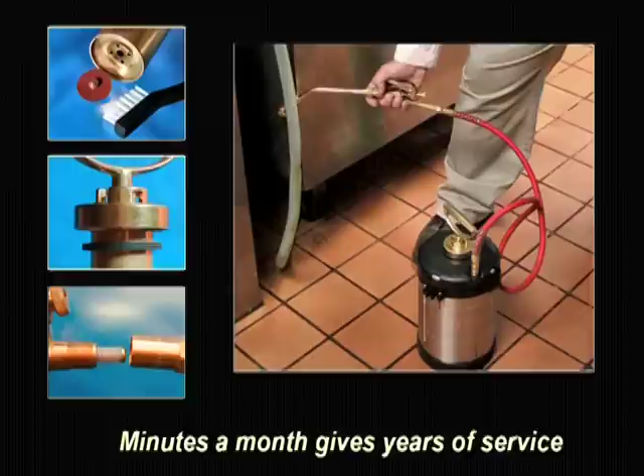This session will cover care and maintenance of your B&G sprayer. The time you set aside to inspect the gaskets, washers, and filter on your B&G sprayer will ensure day-to-day performance and years of dependable service.

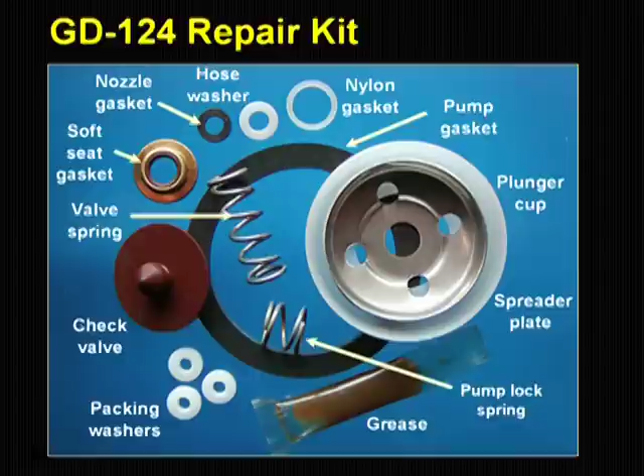Here's what's included in the GD124 repair kit. The kit provides most of the genuine B&G parts you'll need to fix and maintain your sprayer.

The sprayer tune-up kit is designed for repair, maintenance, and regular cleaning. The kit includes a GD124 repair kit, a new nozzle and crack and crevice straw, 2 nylon brushes for cleaning the tank and nozzles, cleaning fluid concentrate, detailed instructions on how to make repairs and order parts, and a DVD of this training session.

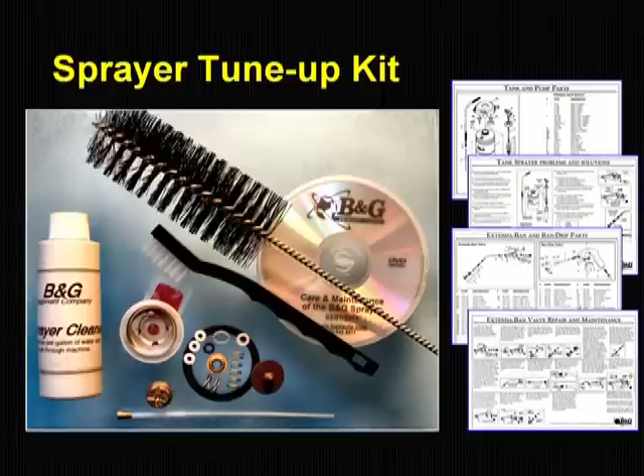The tank sprayer has 3 groups of parts. The valve, the extension or wand, and the hose is one group. The pump mechanism is the second, and the stainless steel tank is the third.

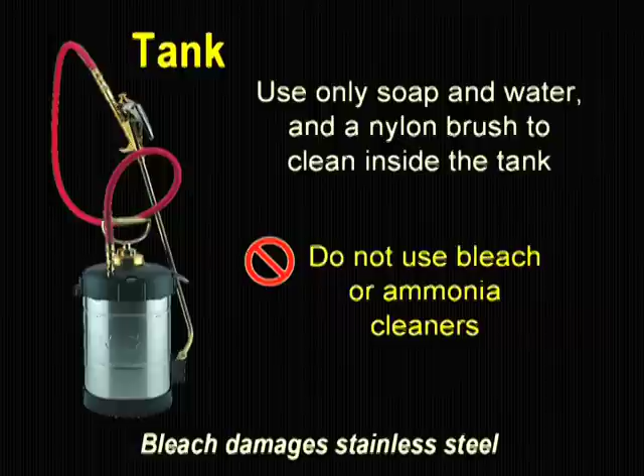Before you start, empty and rinse out the tank with clean water. Use warm soapy water and a long-handled nylon brush to clean the inside of the tank. Don't use bleach or ammonia products to clean the tank or the pump tube. Bleach will damage stainless steel, and ammonia corrodes brass.

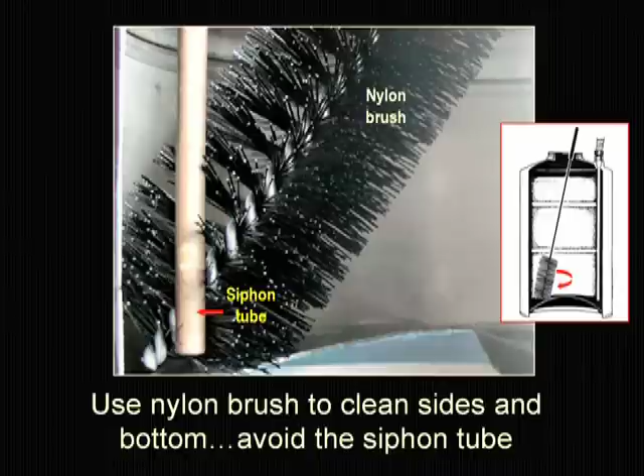Rotate the brush at the bottom and sides of the tank to remove insecticide residue. When using the brush, be careful of the siphon tube at the side of the tank. It reaches nearly to the bottom. When you're finished, rinse the tank and turn it upside down to drain.

Here are some suggestions for the daily care of your sprayer. Don't leave insecticides in the tank for a long period. Rinse the tank and the pump tube before adding a new insecticide formulation. Don't expose the tank to freezing temperatures. This can damage the valve and extension.

The pump mechanism is an important part of the sprayer. The gasket at the top of the pump tube seals air in the tank. The plunger cup pushes air into the tank. The check valve opens and closes with each stroke of the plunger. The pump gasket, plunger cup, and check valve must be inspected and replaced on a regular basis.

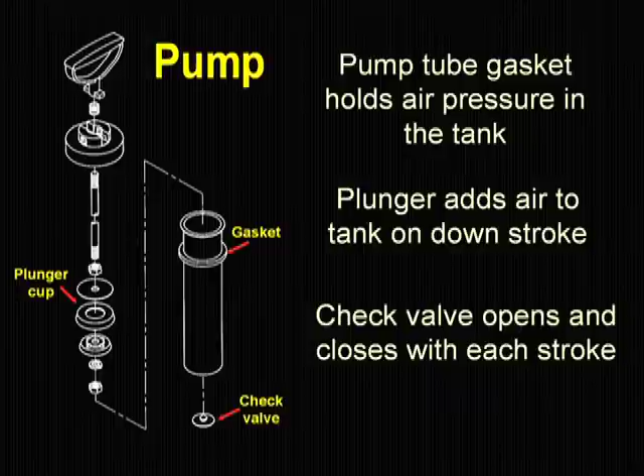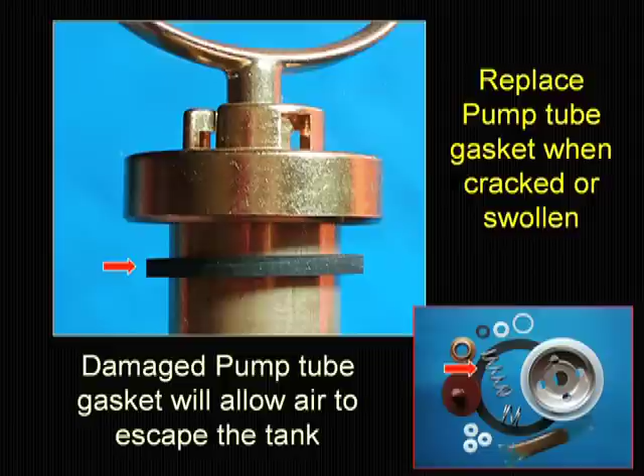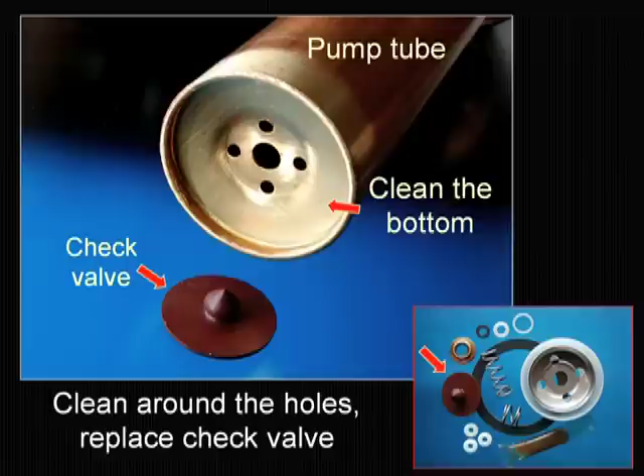Replace the pump tube gasket when it is cracked or swollen. A damaged pump tube gasket will allow air to escape the tank. Clean the bottom of the pump tube with a nylon brush, and periodically replace the check valve. There's one in the repair kit.

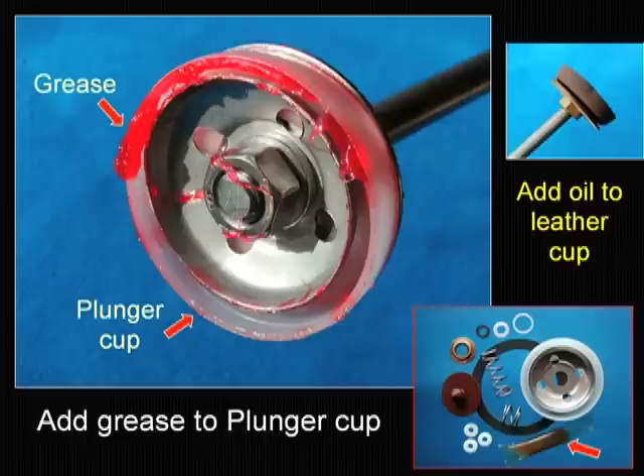Add grease to the plunger cup on a regular basis. You can add a small amount of oil to a leather plunger cup. Inspect and replace the plunger cup when it becomes worn or cracked. There is a replacement cup and a spreader plate in the repair kit.

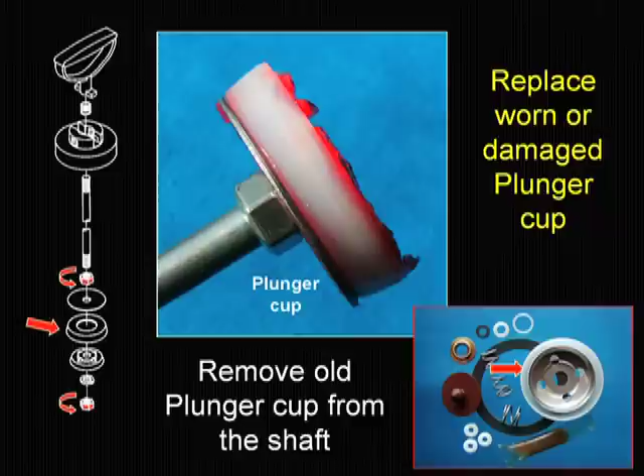Replace the lock spring when it no longer locks the handle in place. To access the lock spring, remove the 2 nuts holding the plunger cup.

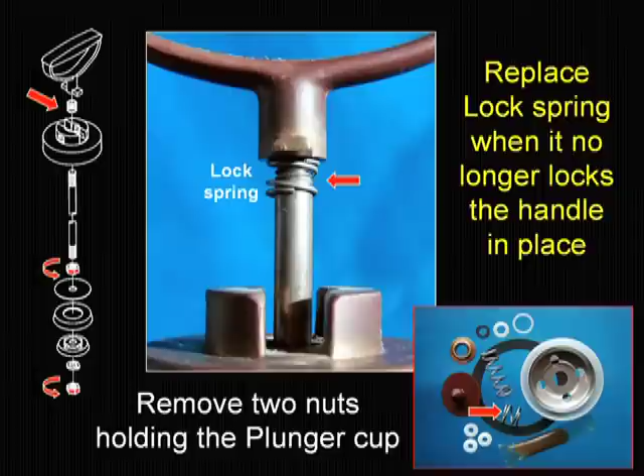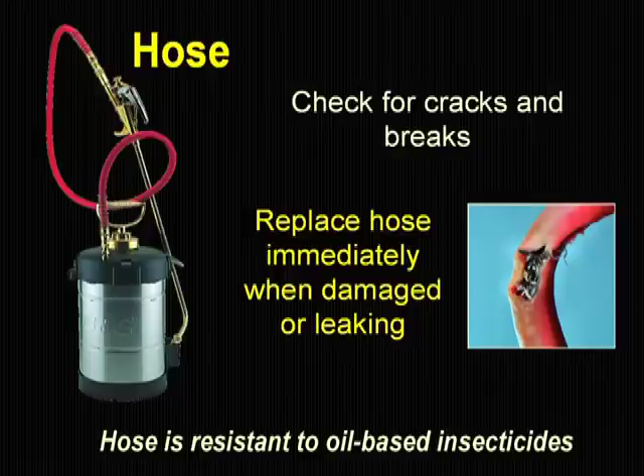The hose should be inspected regularly for cracks, breaks, or other damage. Replace the hose immediately if it is damaged or leaking during use. The protection coils prevent bending and damaging the ends of the hose. They should be kept in place.

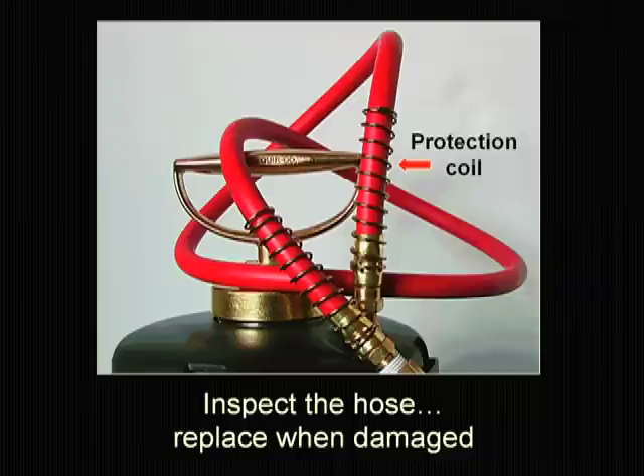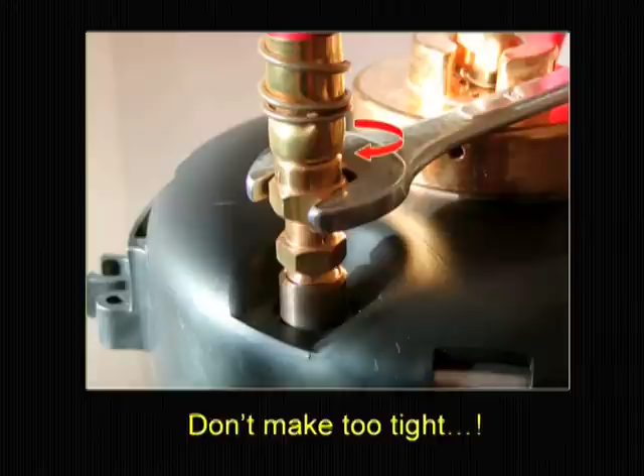Replace the hose gasket if it is damaged or restricting the opening, preventing liquid from getting to the valve. When replacing the gasket, don't over-tighten the hose to the tank. This can crush the hose gasket.

The screen strainer is located between the valve and the end of the hose. This strainer should be cleaned regularly and replaced if damaged or lost.

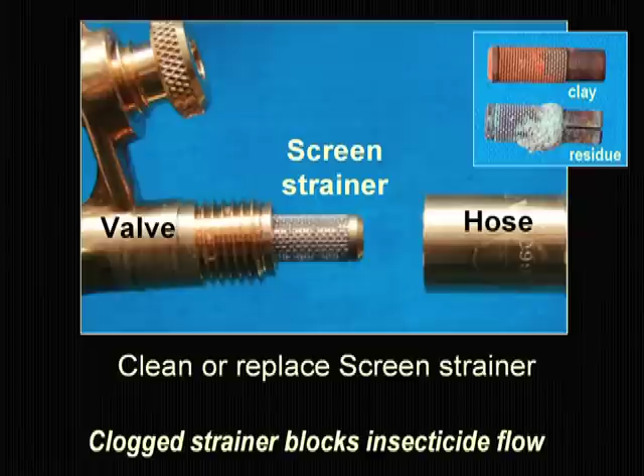A thin nylon gasket prevents leaks at the valve end of the hose. There is a replacement in the repair kit.

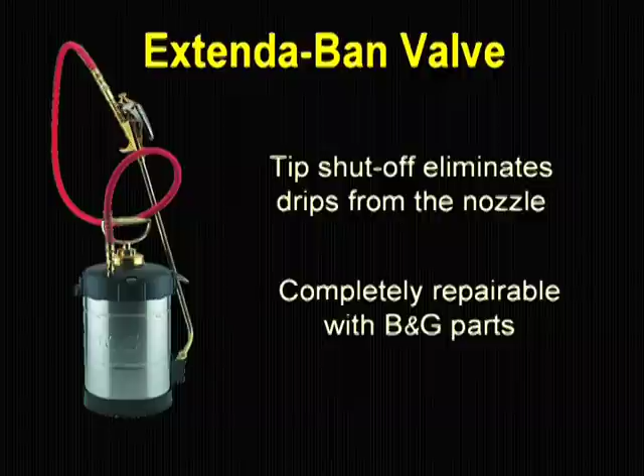The Extenda-Ban valve provides tip shutoff, which eliminates drips from the nozzle. This valve is completely repairable with B&G parts. A 1/4 turn of the packing nut can stop minor leaks, but you should avoid further tightening of the packing nut.

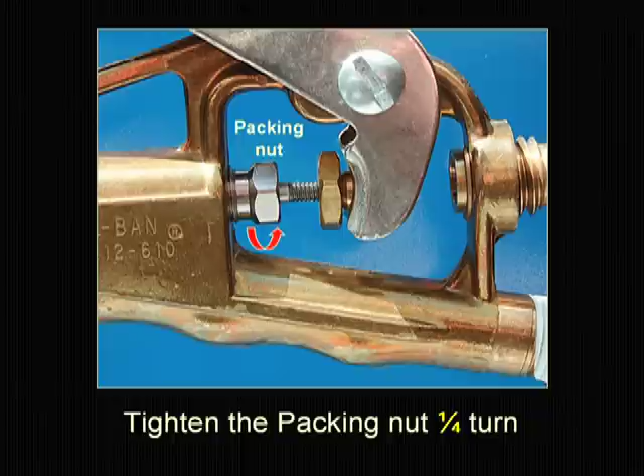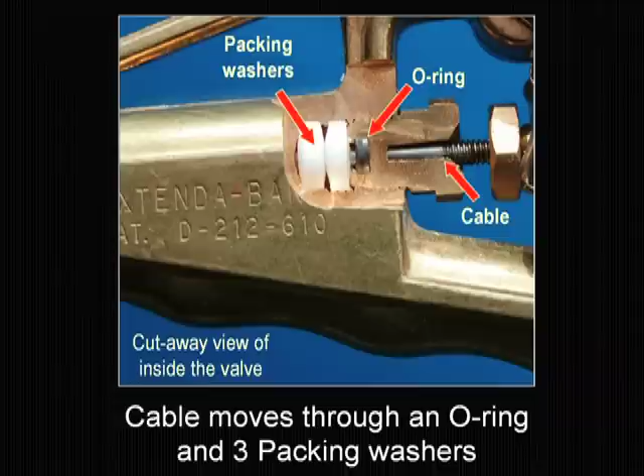The stainless steel cable that extends from the valve to the nozzle moves through an O-ring in the packing nut and Teflon packing washers. Continued leaking of the valve will require replacing the packing washers. Remove the packing nut and replace the old washers with 3 new ones from the repair kit.

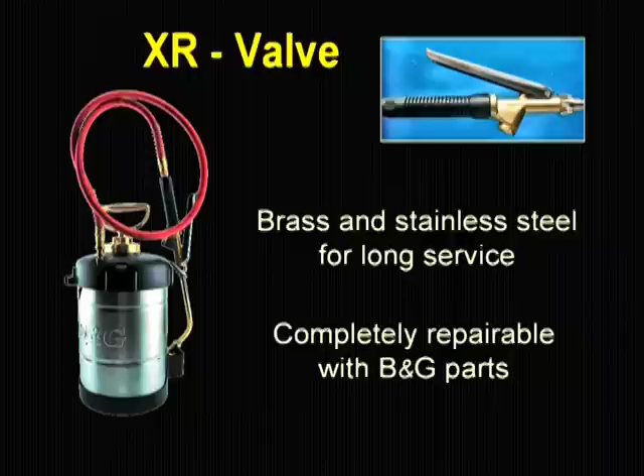The XR valve is made of brass and stainless steel and will give years of dependable service. This valve is completely repairable with B&G parts. The GT100 repair kit has all the parts necessary to maintain the XR valve in working condition.

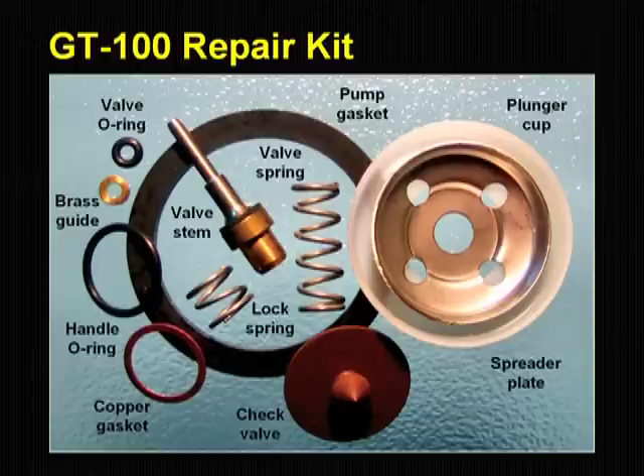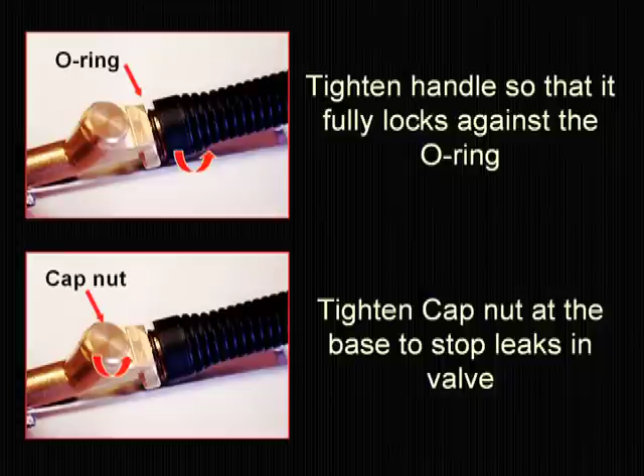Tighten the handle against the O-ring on the valve to stop leaks at the handle. Tighten the cap nut to stop leaks in the valve. Replace the O-ring on the valve when it is worn or damaged. There's one in the repair kit.

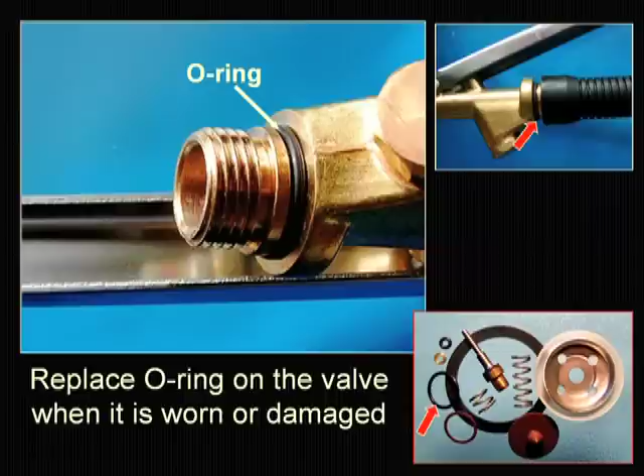You'll have to remove the cap nut at the base of the valve to replace the O-ring on the valve stem.

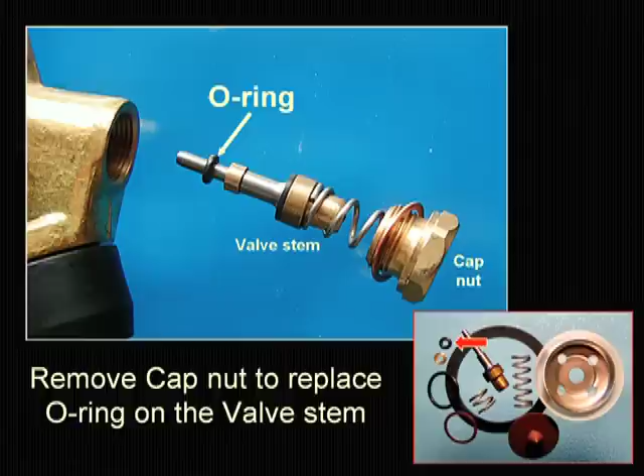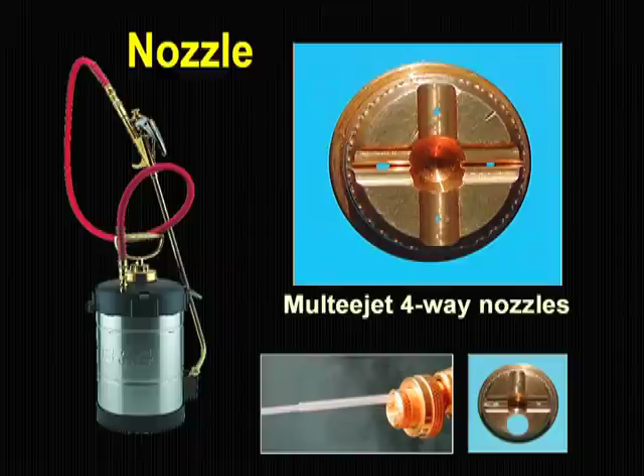The Multeejet 4-way nozzles have 2 fan sprays, pin streams, or an opening for a crack and crevice straw. Use only a nylon brush to clean the nozzle. This will not change the spray pattern or increase the delivery rate.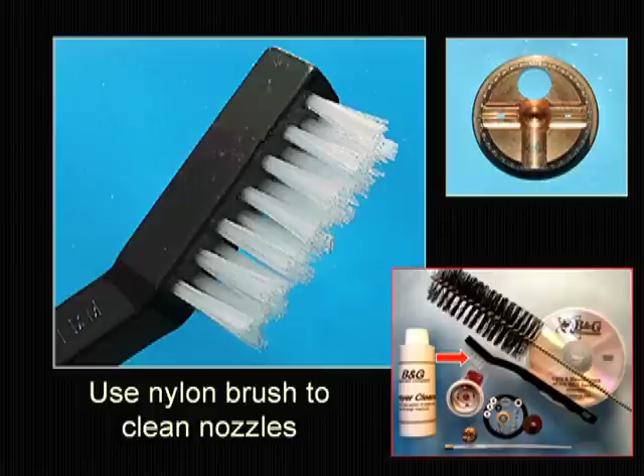Old nozzles have increased flow rate and waste insecticide and money. Nozzles should be replaced every 2 years.

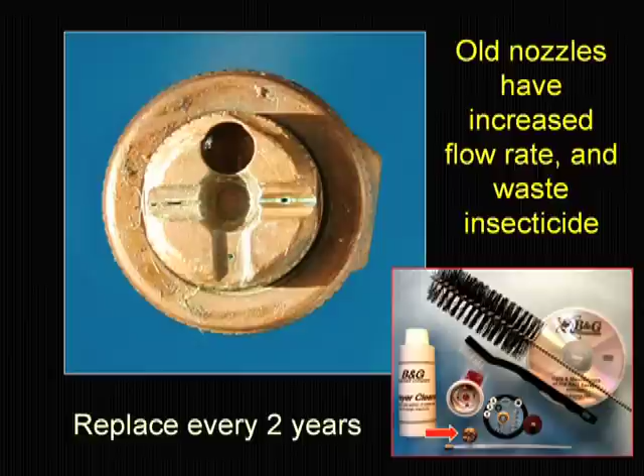The nozzle gasket prevents leaks around the nozzle when spraying. A replacement gasket is in the GD124 repair kit.

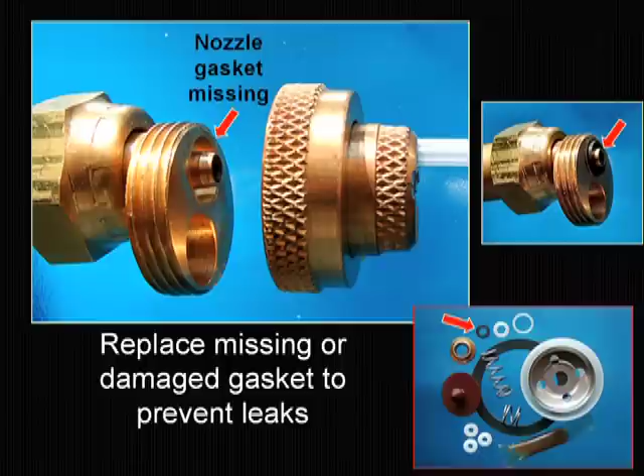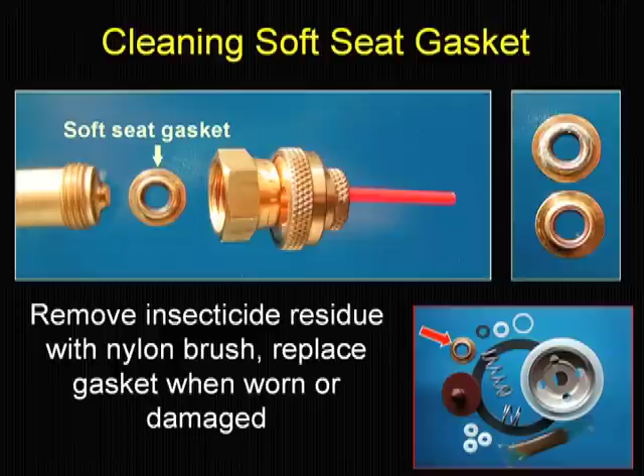To clean the soft seat gasket, you will have to remove the nozzle assembly. Use a nylon brush to remove insecticide residue. There is a new soft seat gasket in the repair kit. When you reattach the nozzle assembly, position the soft seat gasket so that the flat side is facing the nozzle.

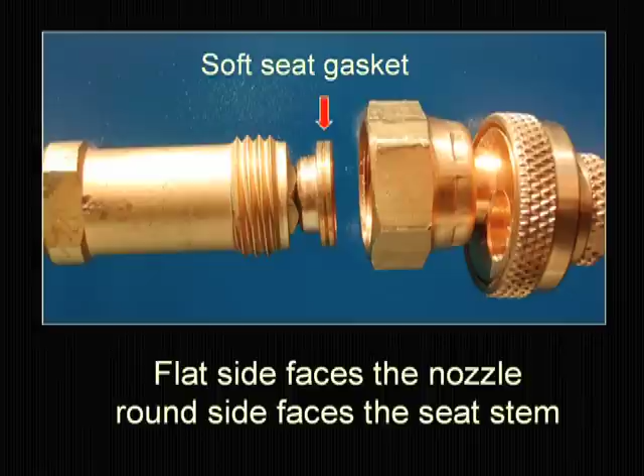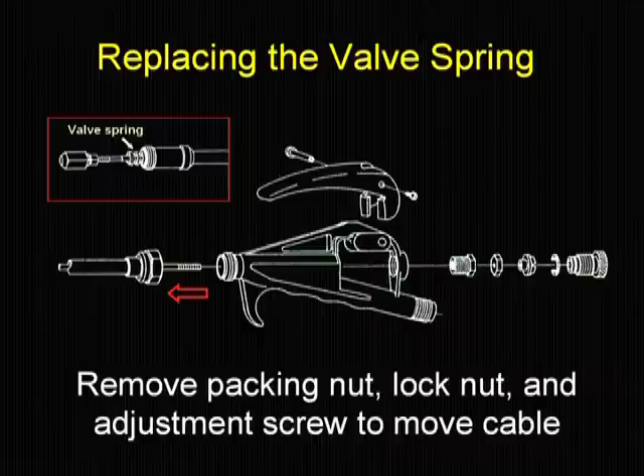To replace the valve spring, you will have to disassemble the valve and move the cable forward. Unscrew the seat stem, then the seat stem nut from the cable. Now you can replace the valve spring. There's one in the repair kit.

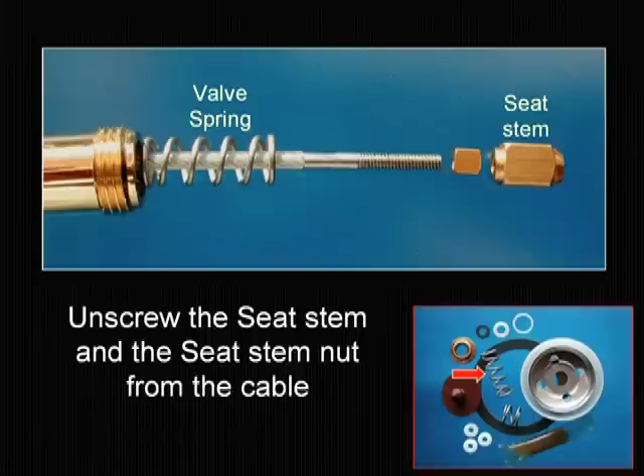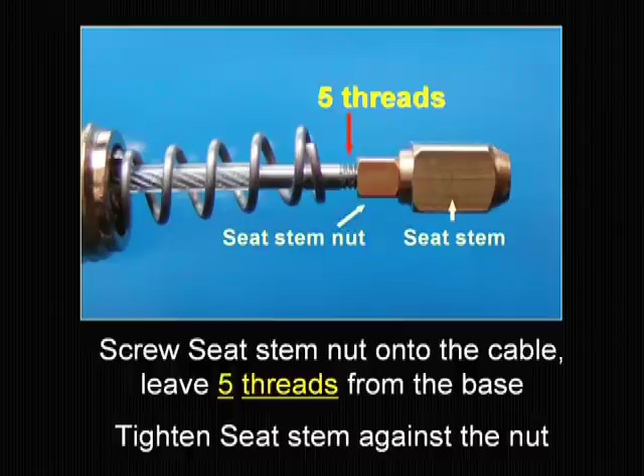When replacing the seat stem nut, leave about 5 threads from the base. Then tighten the seat stem against the nut. To finish the job, you'll have to reassemble the valve, starting with the adjustment screw and finishing with the trigger.

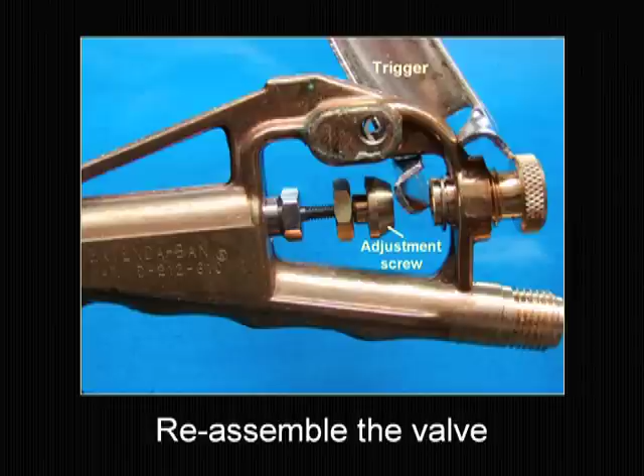Take the time for care and maintenance, and your B&G sprayer will give you many years of reliable service.